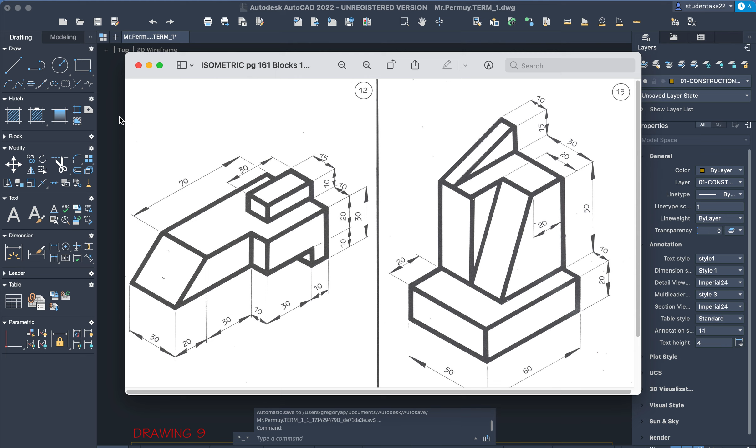Alright, so let's get started with that. Step 1, obviously, construction line layer, and I need my isometric grid thing. I don't know what it's technically called, but that's the name I like to use. And you can see that's not centered, so I want to make sure, grab this middle pick box and grab it to the vertical. Alright, so it's centered on the vertical. That's where I like it to be.

Then from here, I need my 30-degree angle, so I'm going to go at 110, less than 30, so it gets 30 degrees. And I'm going to move it down to there. Then I just mirror that line, along this vertical line, here's my mirror. Erase source objects, no. Okay, but that didn't go to the end properly, so I gotta pick them here and take them down to there.

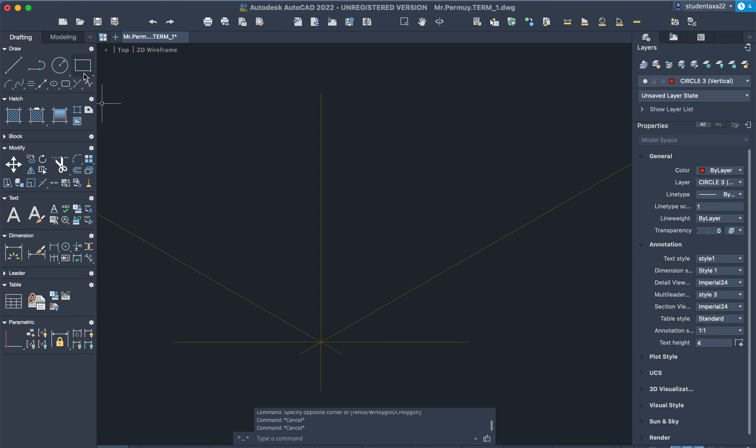Right, so they're all on a 1 point. Good. So that's there. Then I'm gonna go to my circle vertical, and my overall height for just that center section of the block is 20. Zoom in here, make sure I get this in the middle. 20. And I'm going to copy this line and this line immediately from that center point up to 20 to that point. Alright?

Good. To the left, we go 40, we discussed. So I'm going to go circle left. Click in there again, the center. I'm going to say 40. And I'm going to copy, well, this vertical is very tall, isn't it? Let's shorten it.

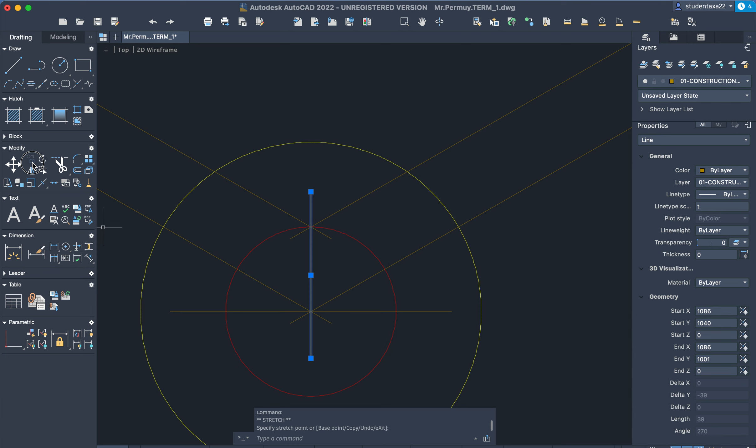Maybe there. So I'm going to copy this vertical line from on the line. Always make sure to click on the line every time so you get it where you want it to be, no guesswork. And now I could shorten these two long lines. I just need to use stretch. Highlight both of them, and click on the one line and click on the same line down there.

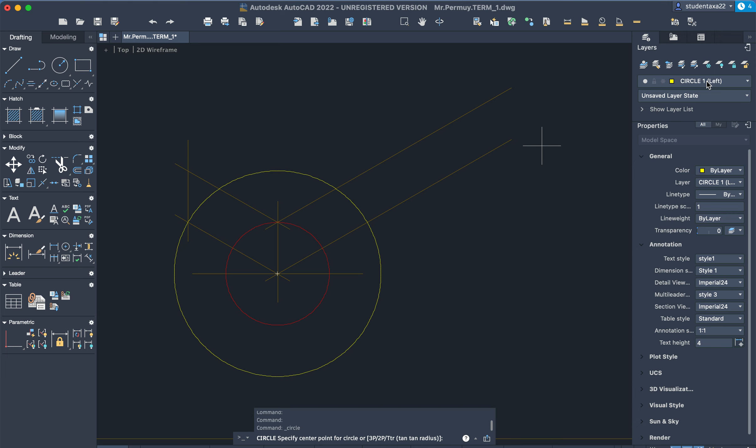Good. On the next side, we said we're going to go 90. So circle right from the center point, 90, and let's put the 20 one time, 20. We already had 20 for the height, but anyway, copy my vertical line from on the line to on the 20 and on the 90.

Alright, good. So copy my right 30-degree line from that center point all the way over to here. I'm going to copy this one from that point back to 20 and back to the 90. Alright, so, and then we need to cut out the section in here, which is 10 wide and 50 deep.

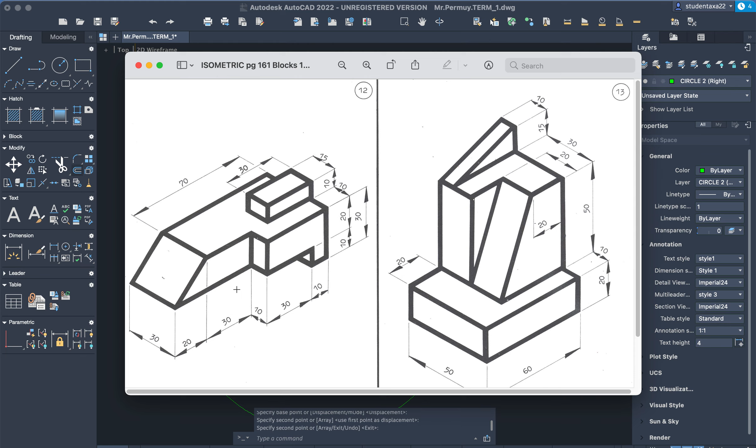We're already on circle right, so let's just do that 50 one time. Alright, copy this vertical line from here to here. That 50 comes from 20 and 30 here. So we're going to go back 50 and go in 10. Okay, so that's my 50.

And we want to go across 10. I'm going to put a circle here. Oops. Let's put a circle left. Where is it? Circle going left. Circle. Okay, 10. Then I'm going to copy the vertical to the 10. That's good. Copy this line from here across to there.

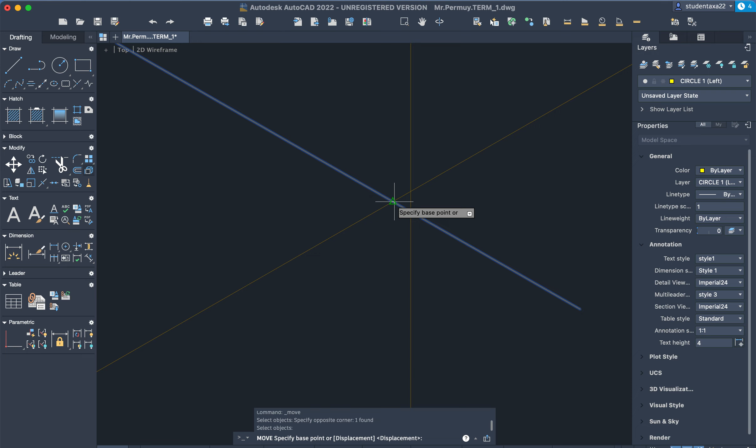And then I'm going to copy this line. I can shorten, no, I can't shorten this one. I'm going to copy it from here to here. Oops, that did not go on properly, rushed, so I'm going to move it again. Still didn't get it properly. Good, perfect, 1 point. All right, now this line I can shorten.

Good, and I have to copy that line, you guessed it, from that point down to this point. Copy this line from this point across to this point.

And this line, I could use the other one, let's use this one, so it makes more sense from there down to there. And then that line I'll shorten because it doesn't need to be all the way out here. This one I'll keep long even though it stops here because there's another block that adds on here which uses that same line, so I'm going to leave it there.

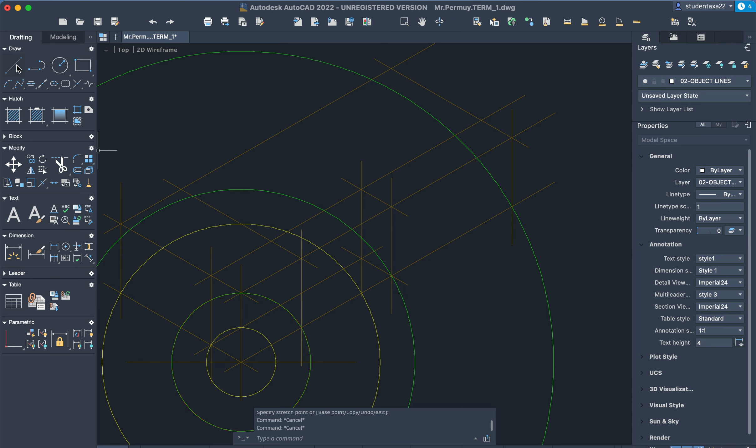Alright, so to darken what we have so far that we know, we're going to go to construction line layer, object line. Sorry, we don't want to get confused with what we're drawing, so we know there's a line from here to here.

Come down all the way to the end here, across there, but from here we don't want to go up, we go at an angle to there, back across to here, is it there? Over there, very good. And we go from this point back to this point and out to this point.

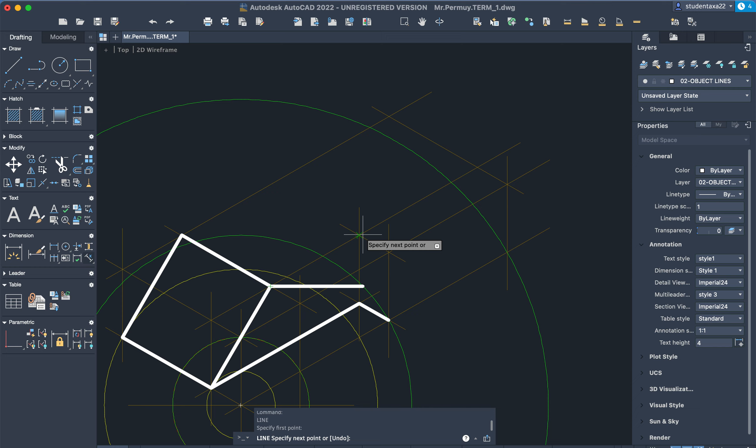Down there and put in this line here as well. Good, so that's what we have for sure. Well, we also know this line doesn't get interrupted, so we can put that in as well. Alright, that's all the object lines that we have so far.

Incomplete. Alright, so from here we need to put that little piece on the top, which comes down 30, up 10, and across 15. So, simple.

We're going to go circle left. We're going to put a circle at this point, and we go across 15. So then we're going to copy this line from there to the 15. Alright, did I get that good? Yes. Alright, so that's 15 across.

At those marks we have to go up. So we'll copy a small vertical to there and there. So I'm going to make sure they're accurate. Is that accurate? Yep.

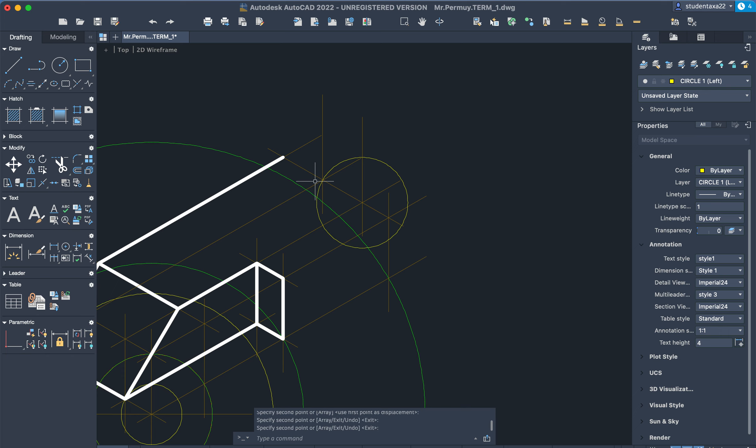Alright, and the height is 10. So we're going to go to our vertical. And go here, and then we put 10. So we're going to copy this line up the height from the center at 10 up to the 10 to there.

Alright, and then this line has to copy to that point and that point. This is the bottom line. The bottom of that, this is the side, this is the vertical edge that we can't see. So this line we won't see it, but we need to know where it is over here.

Now we come down this line 30. So I'm going to draw a circle here. That's a circle right because the receding line goes to the right. Here, 30. And I'm going to copy 1, 2, and 3 from that point.

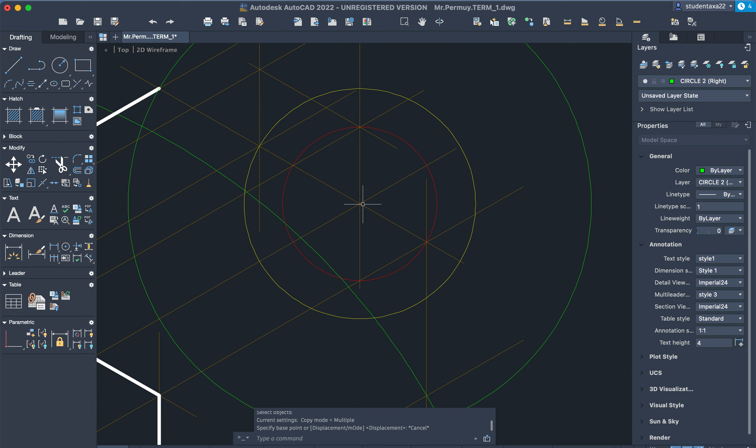Oops. I'm going to copy 1, 2, 3, and 4. From the center there out the 30, which is to here. Looks very confusing, but if you take your time and go through it slowly, you'll understand what you're doing.

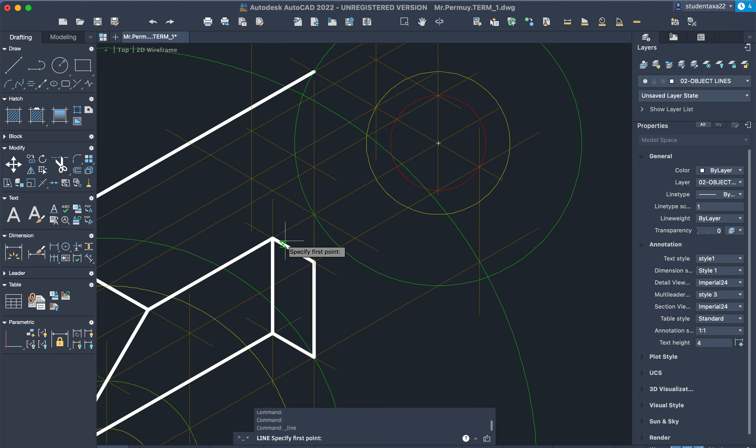So we know that this line goes across to here, comes up to here, comes down to 30, goes across 15, goes up 10, and this is that front surface. This is the side surface, the top surface.

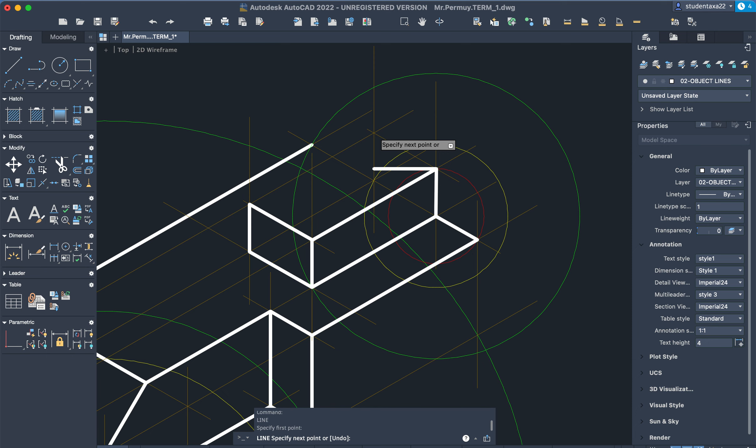Oops, what happened here? I don't know why that moved. Let's close this little gap. Alright, so that part is done. Now we just add the little piece down here and we're finished.

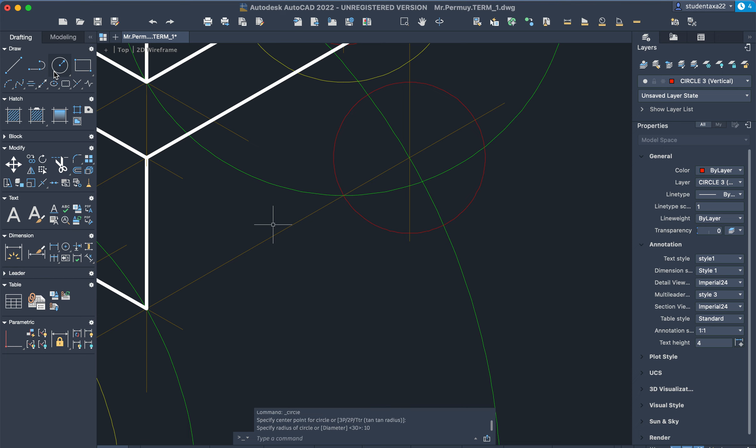So that comes across 10 and down 10. We can use either vertical or right lines. I'll use my vertical, go here, and say 10. This line was long enough, so I'm good. I'm going to copy, do we have shorter lines that way? Not really. So I'll just copy this line from that point down 10 to there.

I'm going to copy a vertical and take a shorter vertical. Click on the line and click on that 10. So that comes across 10 and that goes down 10. But then we also have to come back this direction, so I'll copy this short line here and put it there. Good, so now I go back to my object line layer.

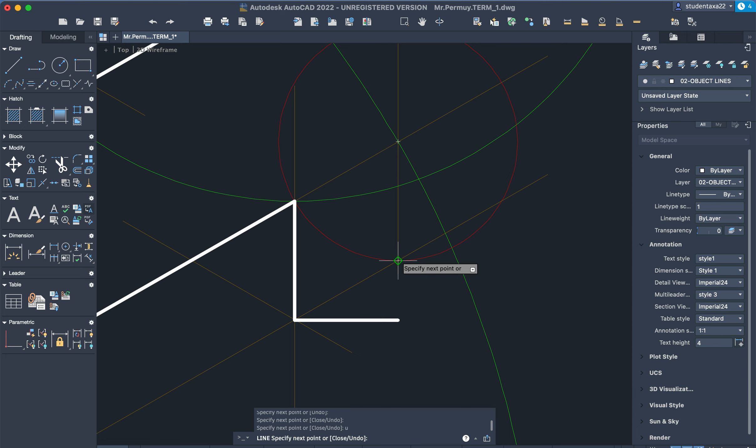Go from this front mark all the way back 10, down 10, across 10, up, whoa, across 10, and then all the way up to here. And then this little receding surface here.

And that is the full drawing for block, what block was that? 12. Now I'm going to do a polyline, and I'm going to come from here to here and across to here, because I like to trim off the circles I don't need.

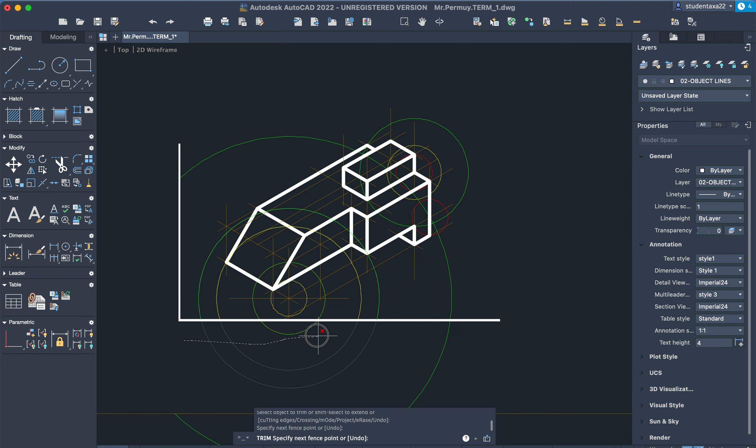Alright, I'll delete that piece, and I'll delete my polyline. So that looks a little bit neater. Maybe we can cut this off a little bit as well, no need for it to be that long sticking out, it just looks weird. Good, so there's that drawing.

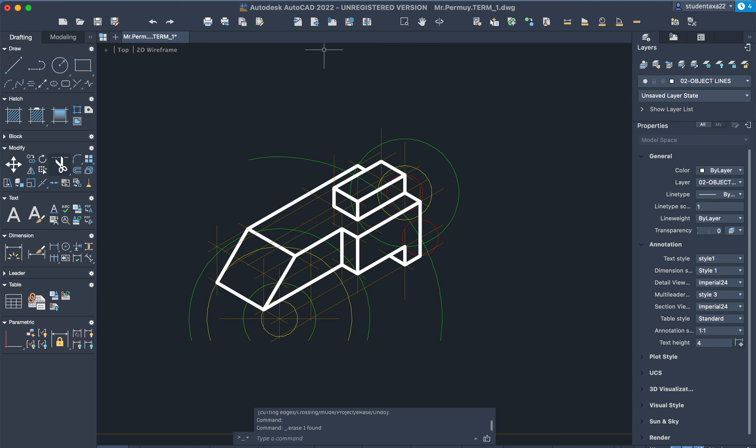Dimensioning. Let's go to the dimensions layer. Dimension, not linear - well, let's use linear, we'll do the heights. This is 10. We'll go continue, you guys know where to find the continue button. That's over 20.

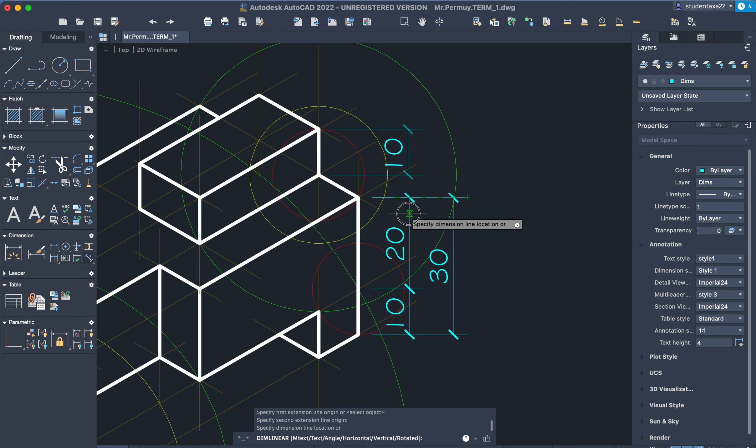Then I want to do a linear again and give the overall 30. That goes there. We have another 10 here. We'll bring that out to that line because we have to put a 10 this way as well. Alright, anything else vertical? No.

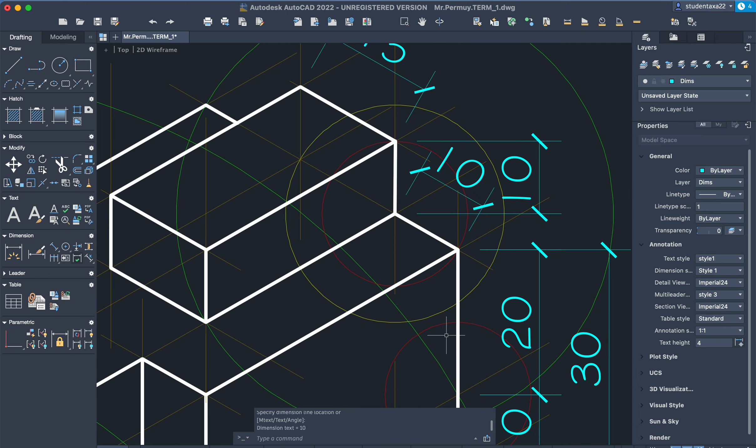Alright, so then we'll go to dimension aligned. We'll say, okay, I want this measurement, it's 15. I want this measurement, which is 10. Good. I want this measurement, which is 30. Good. And I want this measurement, which is 70.

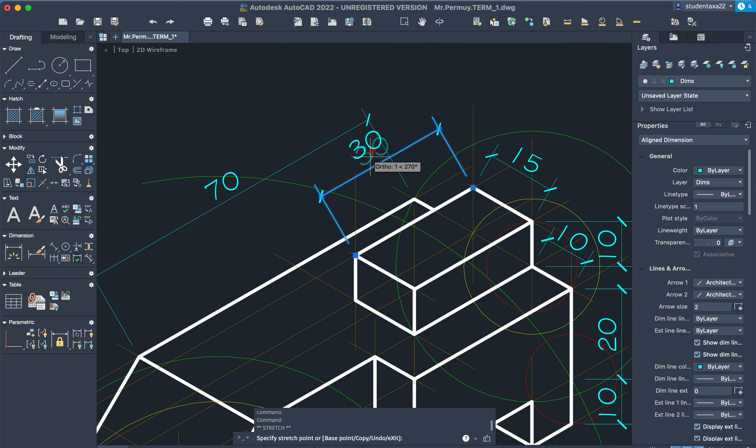Now you see how the text, the line goes through the number. We'll click on that tick box there, and just bring it over a little bit. Also this one here, I don't want it going through the circle, so I can either move that across a little bit as well, or cut the circle a little bit more. So I choose that option, trim that off and get rid of the line. Alright.

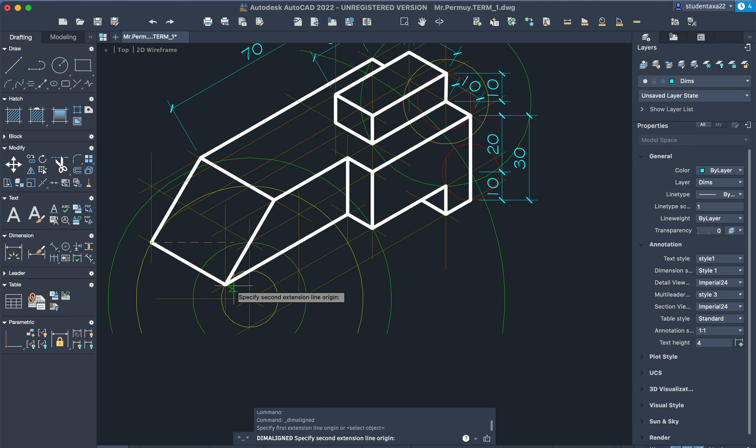Now for the bottom edge over here, we have this 30. There, we'll start from here, that's a 10. Continue - I won't go to this point because that'll be inaccurate. I'm on the bottom edge, so I'll stay on the bottom. I'm going to go to that construction line there, that's 30.

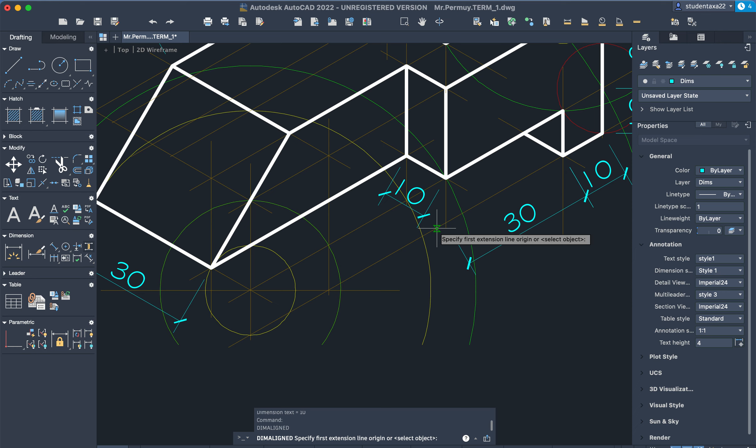Then I'm going to do my 10 in here. Can I do that? Yeah, I can do that. Let's see if we can do this here. Continue button - I don't want to continue that one, so I right click and click on this one. So I continue this one to there, gives me my 30. And go down here, will give me a 20.

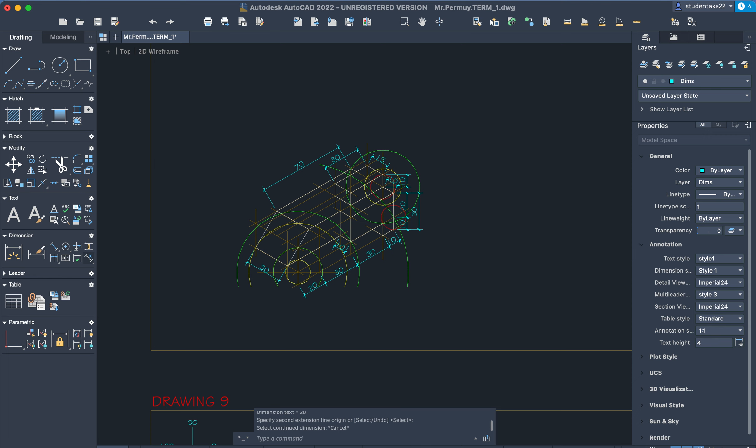Alright, that will work. Oops. So there's a finished drawing. Now I need to copy one of these things. Where do they do them last? Over here. Wow, copy this. Go over here.

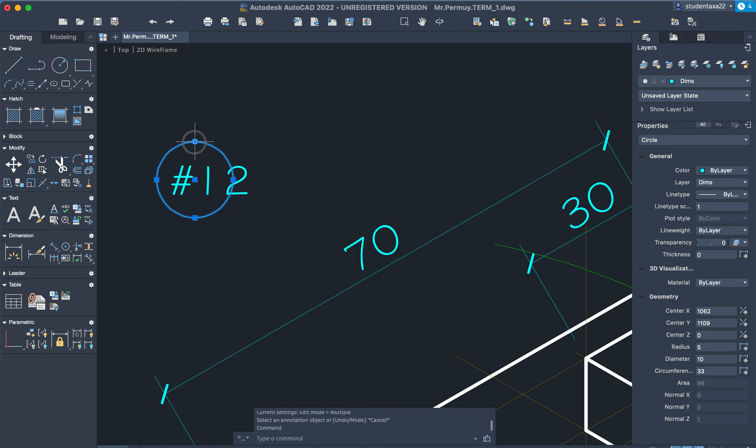And this is block 12. Doesn't really fit in my circle. That's okay, I'll just make the circle a little bit bigger and move it over. Right, so that's block 12. Good, I'll do block 13 next and post that video separately.